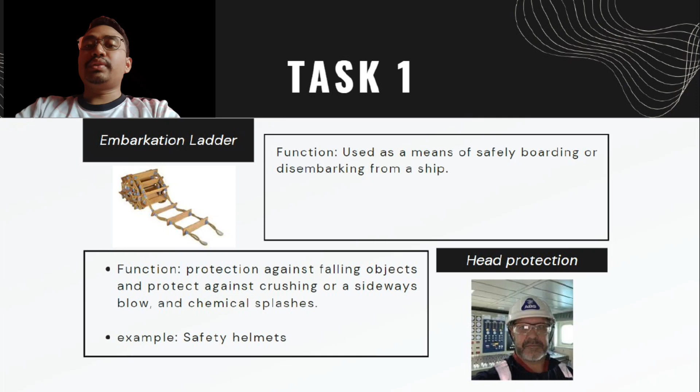The surveyor must wear head protection. The function of head protection is to protect against falling objects and also against crushing. For example, a safety helmet. Next, hearing protection. A surveyor must wear it on board while the ship is in motion. The function of hearing protection is to reduce the noise energy reaching and causing damage to the inner ear.

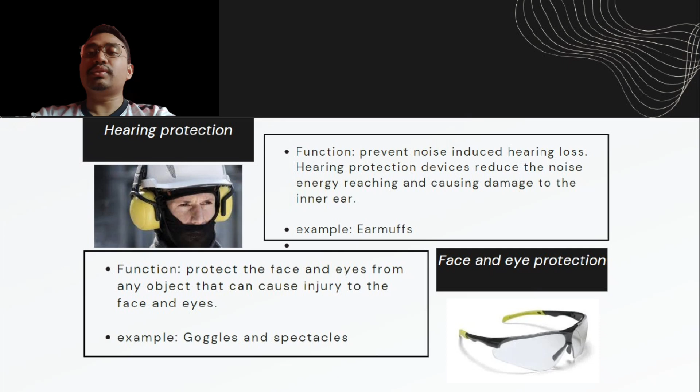For example, earmuffs. A ship surveyor must wear face and eye protection to do a survey while the ship is in motion. Its function is to protect the face and eyes from any object that can injure them. For example, face and eye protection is goggles. Next, a surveyor must wear respiratory protective equipment on board. Its function is protection when work is done in dangerous conditions. For example, a dust mask.

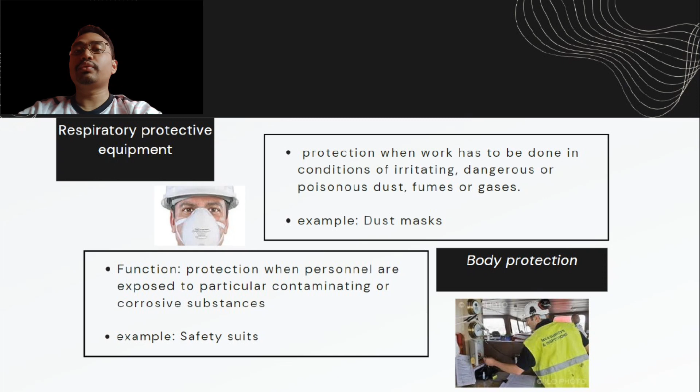A surveyor must wear body protection on board. Its function is protection when personnel are exposed to particular contaminating or corrosive substances. For example, a safety suit.

I'm Syamsul Rifai bin Syamsuddin, S61652. Next, appropriate clothing for the survey is protection against drowning. As an example, we can take the life jacket. A life jacket, also known as a personal flotation device, is an important piece of safety equipment designed to keep a person afloat in water. It must be an appropriate, functional life jacket, personal flotation device, or buoyancy aid.

In addition, other examples are immersion suits and anti-exposure suits. They are designed to protect individuals from cold shock and hypothermia that can result from immersion in cold water. These suits keep individuals dry and protected from cold water. Next is hand and foot protection. For example, safety boots and shoes, used to protect feet and hands from any kind of danger that could affect the seafarer.

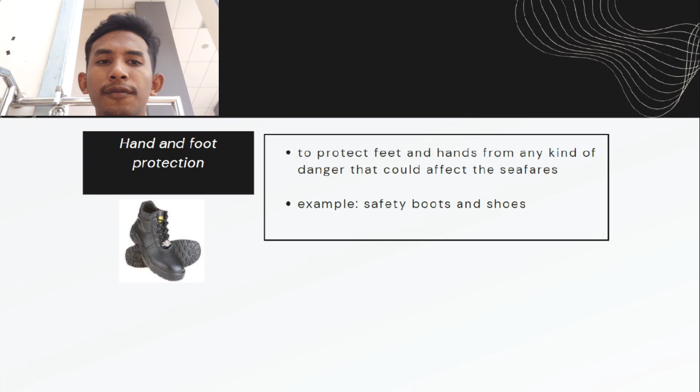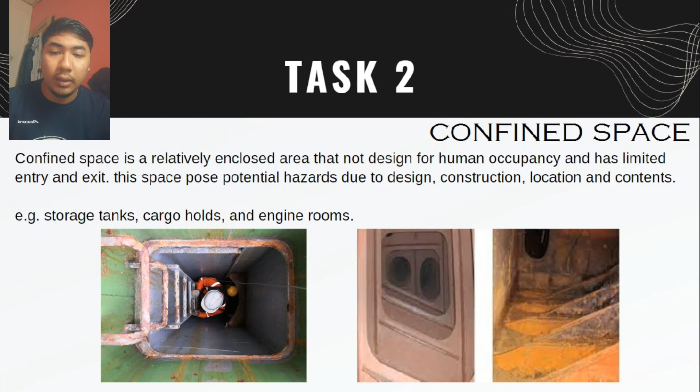Assalamualaikum warahmatullahi wabarakatuh. I'm Amirul Arif, continuing with task 2, which refers to confined spaces. A confined space is a relatively enclosed space that is not designed for human occupancy and has limited entry and exit. This space poses potential hazards due to its design, construction, location and contents. For example, storage tanks, cargo holds and engine rooms. Those are a few illustrations of confined spaces.

Next, we proceed to the procedure for confined space entry. First, there must be duties and responsibilities of a competent person and authorized officer. This means a person with the knowledge and experience to ensure the assessment of the space and atmosphere is safe for entry. Second, the procedure mentions precautions before entering a dangerous space.

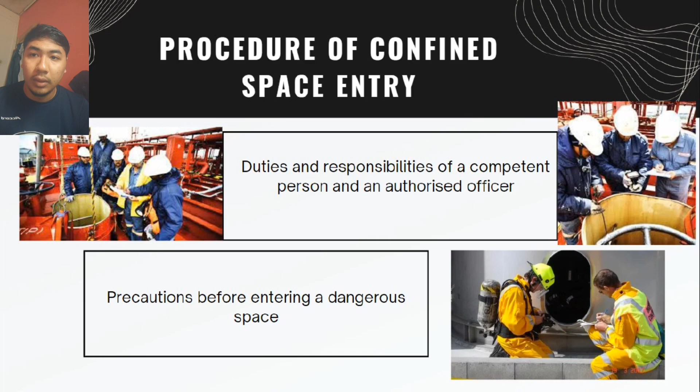That includes: a competent person should make an assessment, the person in charge of the operation should be appointed, then the space should be prepared, ventilated and secured for entry. The atmosphere of the space should be tested, and a permit to work system should be used to enter the confined space.

There's a procedure about identifying the potential hazard. That means the oxygen deficiency, the toxicity of oil, flammability of the space, and other hazards.

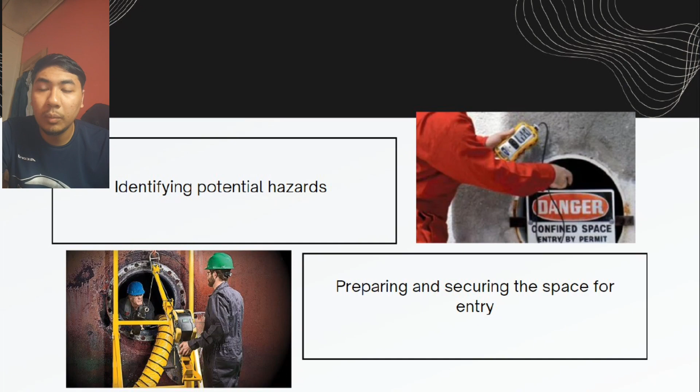Next is preparing and securing the space for entry. That means precautions should be taken when opening the enclosed space entrance, as it's potentially a dangerous space.

Testing the atmosphere of the space is required, carrying the atmosphere testing equipment. This is for oxygen deficiency, flammable gas and vapors, and toxic gases.

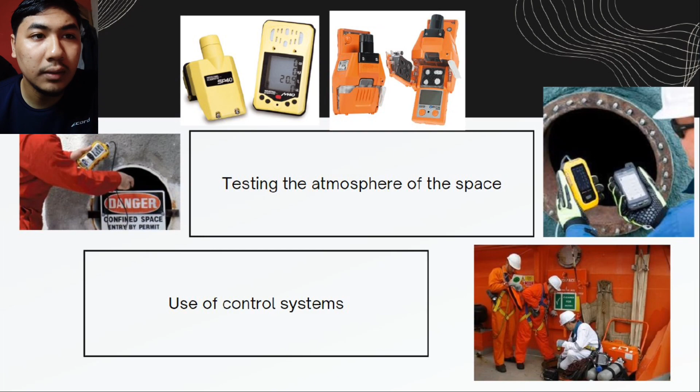Next procedure is use of a control system. This should be made of the permit of work system. This permit contains 5 sections: work, checklist, certificate of checks, personnel entry, and cancellation of certificate.

This procedure covers safety precautions before entry. The space should be lit adequately and ensure no source of ignition is put into the space unless the authorized officer is satisfied that it's safe to do so. Rescue plan and equipment must work and be ready to use to ensure emergency rescue works properly.

Procedures and arrangements during entry: ensure ventilation continues working during the period the space is occupied and during breaks. Any failure of the ventilation system, the space should be left immediately.

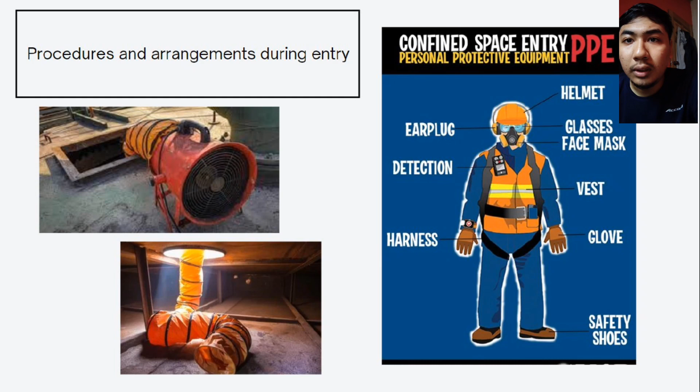The space should be tested periodically whilst occupied, and personnel should be instructed to leave the space if there is any deterioration of the condition.

Lastly, procedure on completion. When the permit of work has expired, everyone should leave the space and the entrance should be closed, where the space is no longer a dangerous space, declared safe for normal entry.

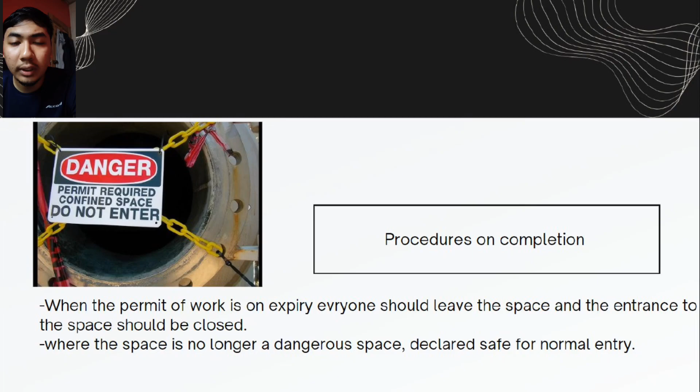If an emergency occurs, the general alarm on the vessel should be sounded so that backup is immediately available to the rescue team. Under no circumstances should the attendant enter the space to help the men.

Then the situation should be evaluated by measuring the risk, assessing the manhole, and preparing the equipment needed for the rescue team to wear. Next, in this scenario, the evaluation process should prioritize checking the air supply first.

The situation must be evaluated first, and the air supply in the confined space should be prioritized for checking. But if the person is heavily injured or in a gravely injured state, they should be rescued first as quickly as possible.

The person entering the manhole must be fully equipped with suitable equipment, breathing apparatus and resuscitating equipment. Breathing apparatus should only be used in an emergency where entry into a space that has or is suspected to have a dangerous atmosphere is essential.

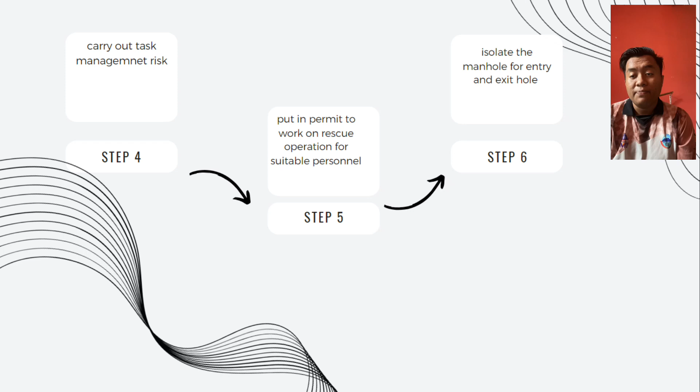When entering the manhole, the capacity of the self-contained supply should be sufficient for the wearer to escape to a safe atmosphere. If the breathing apparatus such as the air tank cannot be worn to access the manhole, the rescuer should enter without it, but must always make sure a face mask is worn to avoid the accident being repeated on the rescuer.

While in the rescue process, the rescuer should always check the situation and the atmosphere so that the rescuer or rescue team could continue their work.

The rescue team should always reduce other risks under review during the rescuing process, as in dynamic risk assessment. After the victim has been rescued, the rescuer should secure the site, remove the isolations, and return to the surface of the manhole.

Lastly, they should review the risk assessment and update it to the higher ups so that it could be properly reported.